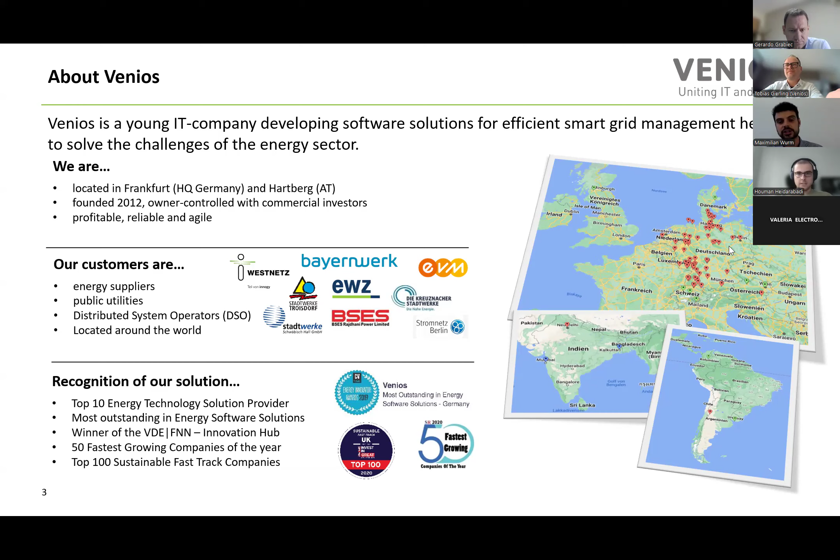And as I said, I will start with a very short introduction about the history of machine learning. What are the key approaches in the field? This is maybe also just a reference for afterwards if you get the slides: what is there, what is the tool set? I think we should not go through each of them, but the idea behind it is the tool set is the same for everybody. And if anybody wants to join the field of artificial intelligence, now it's the perfect time, because to tell the truth, everything nowadays is based on deep neural networks.

And I have to admit, also my study plan of 8 years ago is more or less like the history of machine learning, and not many of the algorithms are still reasonable to apply. But one can see historically, it all started a long time ago when somebody thought about, oh, there are artificial neural networks. We try to simulate the brain. Just to have the idea how long it took.

But then only 30 years later, really progress had been made when the first computers emerged, which had a little bit more reasonable compute power. First, it was statistical approaches. Everybody who does forecasting knows the ARIMA algorithm. And then it started to do it with artificial neural networks. They were the very first primitive ones.

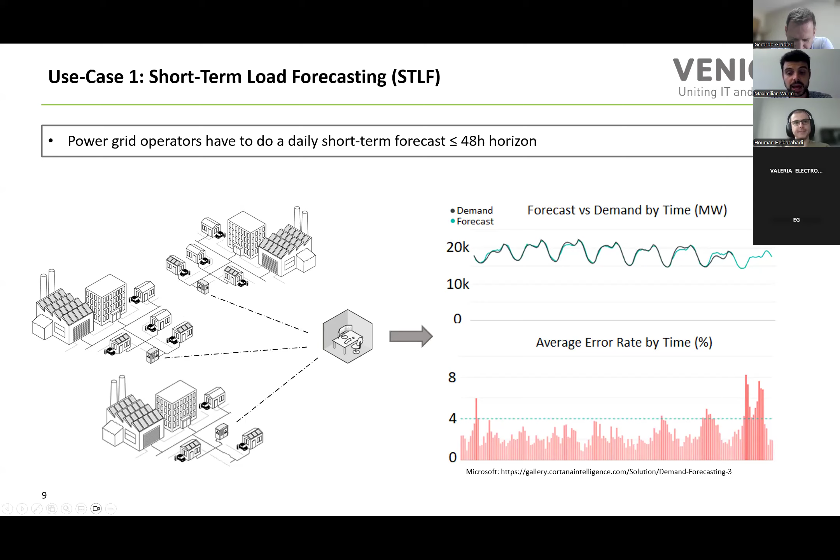And how do we do that in the end? Funny enough, there are a lot of approaches. You can do it statistically, you can do artificial intelligence, which of course is interesting for us. You can have expert systems. You can apply all kinds of intelligence to the problem, while statistical and artificial intelligence are both kind of AI.

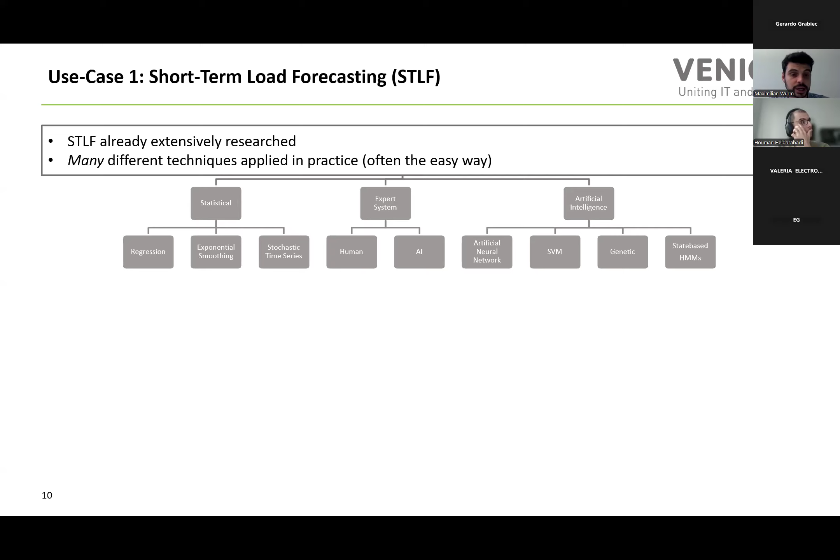But what is really used mostly in the industry, to tell the truth, is humans, which nowadays still make standard load curves. Here in Germany, for example, still. And this is where we also have a very nice market, because we can apply better artificial intelligence algorithms and with that improve the current prognosis quality.

One thing which is important: the more houses you have, the better the prognosis will be. Of course, it's the law of large numbers. If you have 1 million households, the prognosis quality will be much better than if you only want to prognose 2 households, because for 2 households, it makes a large difference if somebody is stuck in a traffic jam or not, and is at home at night or not. And for 1 million households, one person will be surprisingly at home and the other will be surprisingly away, and then it outbalances itself. That's what I meant with large numbers.

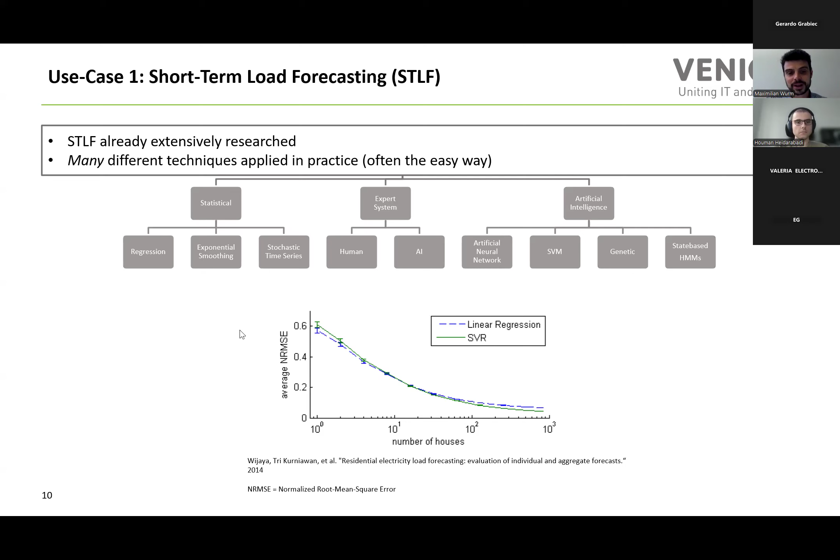A lot of DSOs nowadays don't really use all these cool artificial intelligence-based algorithms, but to be practical, to tell the truth, they really just take standard curves and sum them together. Like, I have 5,000 households and they all add up with a standard load curve. And then I have my consumption, and that's good enough for everyday life.

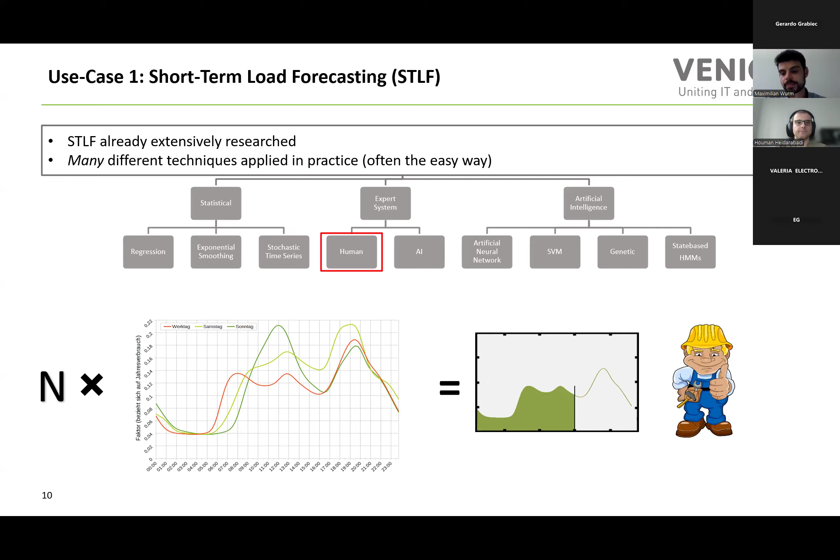Until now, and that's what is now interesting for the new generation, the energy system got much more complex, because these nuclear power stations I talked about disappear at some places, but then we get all these renewables and electrical vehicles, and you need much more insights. And that's what is then new.

As I showed you on the map, there are different algorithms you can apply, and neural networks are one of them. There are these statistical approaches, other historic approaches, but to get the very best performance nowadays with all the compute power, it's mostly artificial neural networks. You have a network, you give in the historic power, maybe the time you want to prognose, the weather, whether it is a national holiday or not. And then your neural network will in the end spit out the actual energy consumption.

And there are more complex architectures. This would be just a simple multi-layer perceptron, but there are also these long short-term memory networks, which, as I said, can remember the past much better. So they have a better understanding of what happened yesterday and what it means for today. Then you can hand in those and still have a fully connected network all going together and giving you a better prognosis.

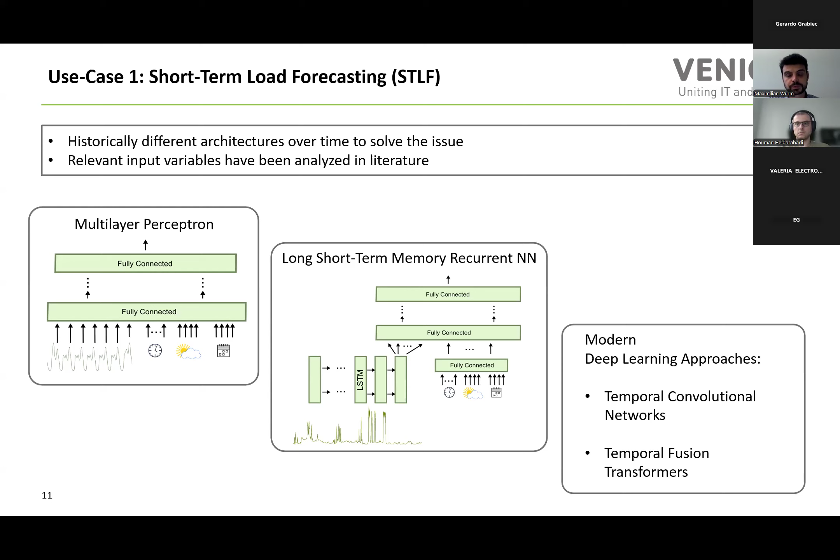Another application for it is non-intrusive load monitoring. So we leave behind the forecasting. Something else we can do is disaggregating loads in the field. That means you have some load profile and you want to understand what is in it. This is indeed a real measured load profile from Christmas Eve at my parents' place when I was at home in 2017.

And here you can really identify appliances based on artificial intelligence. So you can actually see what I did on my Christmas evening. We had an electric heater on because we were sitting in the garden first, and it was winter. And then somewhere around 5, my mother started the stove for the dinner.

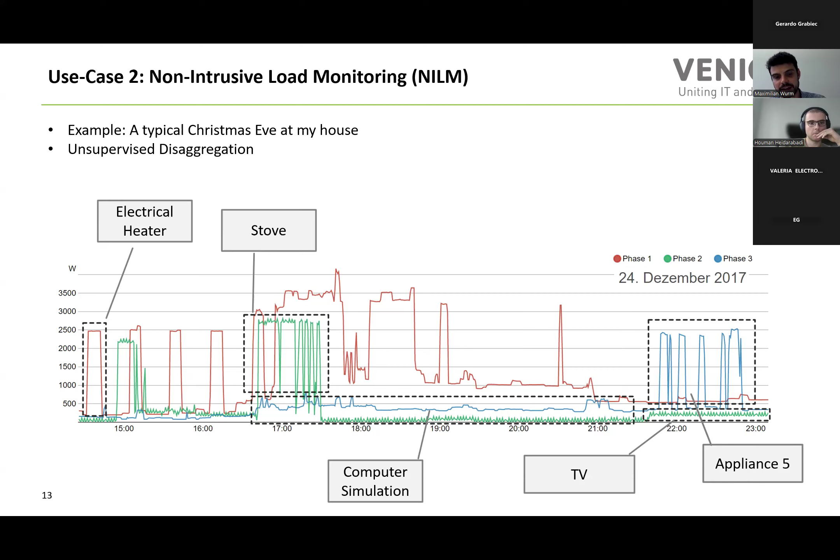In the end, I still had work on artificial intelligence going on that year. That's why you can actually see my PC in the background running an artificial neural network and training it. And then in the very end here on the right, you can see the dishwasher after we had our dinner. And for this, you need an algorithm as well, which understands, okay, this pattern here is maybe the dishwasher. Oh, apparently these slides broke.

In the end, it's really the same thing as when you want to identify an elephant in a picture. You have this complex picture and you want to recognize a certain pattern. Just that here you don't look for the elephant in the picture, but you look for the stove in the power flow. And until today, there are really a bunch of different algorithms for this disaggregation.

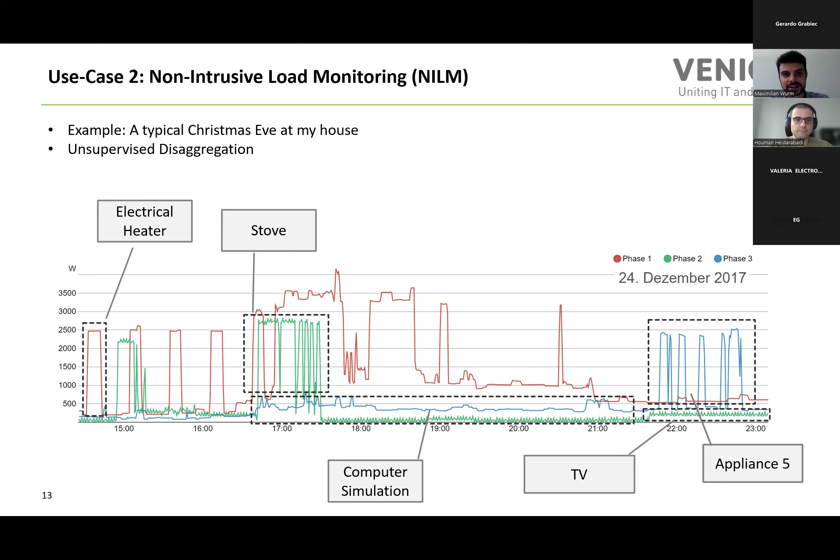And now we have a third use case, and this is actually presented by Houman, because that was actually your scientific work at TUM, right? University in Munich. Yes.

So should I share my screen or will you continue? I can share. You just give me a short... continue. Okay. So let me start from the first topic. Thanks, Max.

Now I will be presenting my master thesis at TUM on enhancing power flow studies. So I used physics-based deep learning to solve the power flow problem. And we are currently working to implement it in our future work. So firstly, power flow analysis is fundamental for design, operation, and planning of electrical power systems. It allows us to calculate voltage at each node and determine how real and reactive power flows through the lines in the network under steady state conditions. Please continue, Max.

However, there are challenges with traditional methods like Newton-Raphson and Gauss-Seidel. These iterative methods often face convergence issues, especially as the system approaches the voltage collapse region. The increasing nonlinearity and uncertainty introduced by modern demand, as Max explained, and the integration of renewable energy resources exacerbate these issues. Continue.

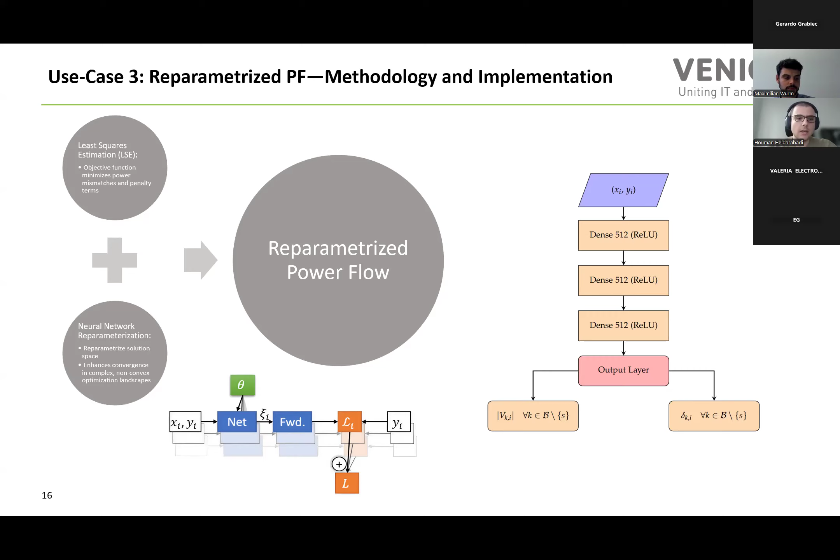So for the implementation, we used Python, and in Python we used, as Max explained, TensorFlow and also PyFlow, which is developed by TUM. Also we use MATPOWER for the validation process, which you can see here.

So first we need to validate our least square estimation against the traditional method. So we have to show that our least square estimation is exactly or is similar to the traditional power flow problem. So to do so, we have tested it on two power systems. One is a 5-node case study and a 118-node case study. So after validation, we do a performance analysis on our proposed method.

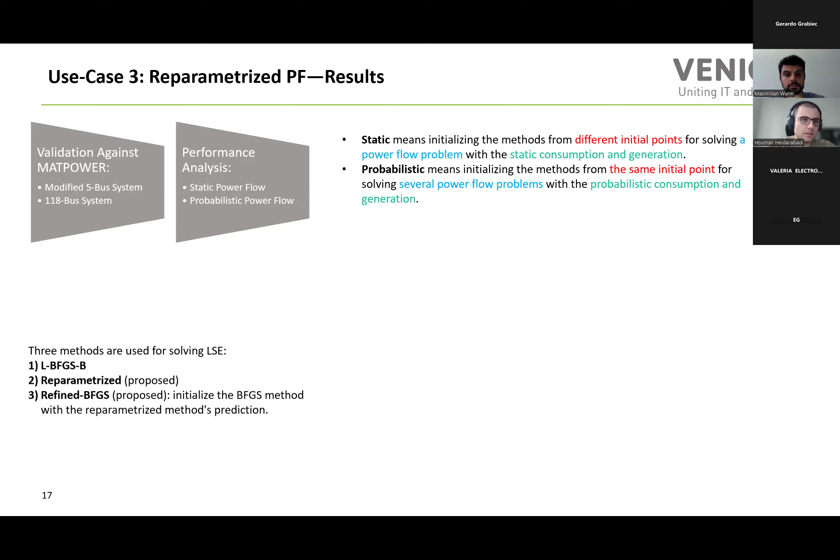So in the performance analysis, we compare it with, can you go to the next? Yeah. We compare our proposed approach with another solver, named BFGS, which is a quasi-Newton-based algorithm. So here in the performance analysis, we have two case studies. One is static and one is probabilistic.

So in the static power flow, we initialize each of these methods that I explained from different initial points for solving a power flow problem with static consumption and generation. But in the probabilistic one, we initialize it from the same initial point, but we have several power flow problems with probabilistic consumption and generation.

So as you can see from the results, our proposed method can outperform the BFGS method. And if we use the refined BFGS method, which means that we initialize the BFGS with the prediction of our trained neural network, we will have a very robust and accurate solution with far fewer iterations to reach the optimal point.

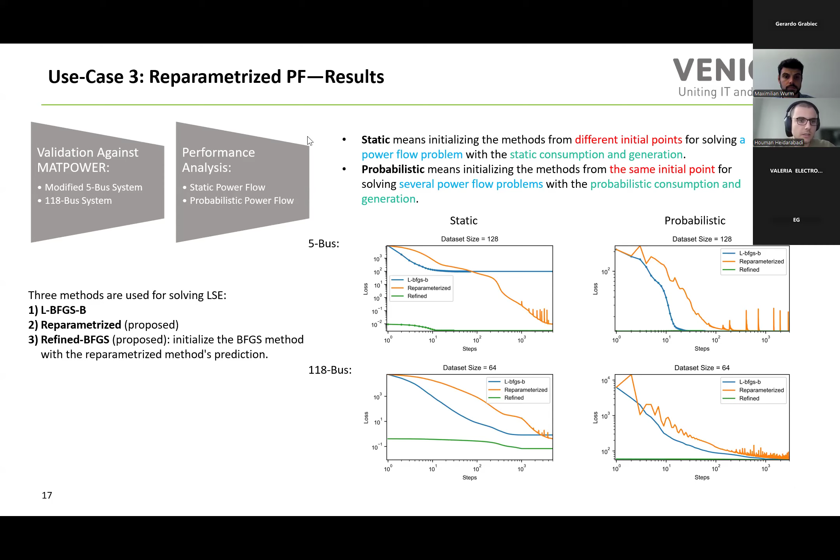Yep. So our research significantly enhances power flow analysis by reparameterizing the solution space with a neural network. We develop a hybrid framework that combines least square estimation, the BFGS algorithm, and neural network reparameterization, resulting in more accurate and robust power flow solutions. This approach was validated through comprehensive case studies, which you have seen, the 5-node and 118-node studies.

So looking ahead, we are working on extending the model to manage more complex scenarios, especially with high levels of renewable energy integration. We also plan to integrate real-world measured data to create a hybrid physics-based and data-driven model, and extend our approach to solve optimal power flow problems.

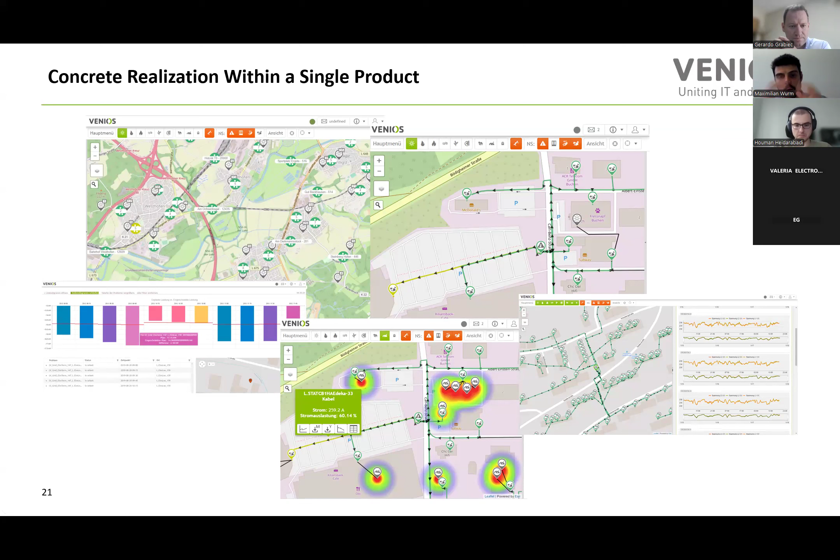And now I shortly want to jump over into the solution, just so you have a short five-minute glimpse of what this really looks like if you visualize it. So I'll try to switch over to my browser. Here we are. Are there questions so far while I'm changing my screen?

Not yet, that is perfect. So I have to somehow say to Bildschirmfreigabe, where are we? So Max, we are - yeah, you're just seeing the other one. I know, I'm just trying to figure out where I can stop the screen share. Here it is. Now I managed, and now I switch over to my browser.

So hopefully you can see it now. Yes, perfect. So we have a lot of applications, and exactly what I said earlier, all these topics about grid operation, grid planning, grid strategy - you can enumerate them and we just add them one by one. So if you have a cool idea about a use case, you could theoretically approach us and use our API to put your solution on top of the available infrastructure.

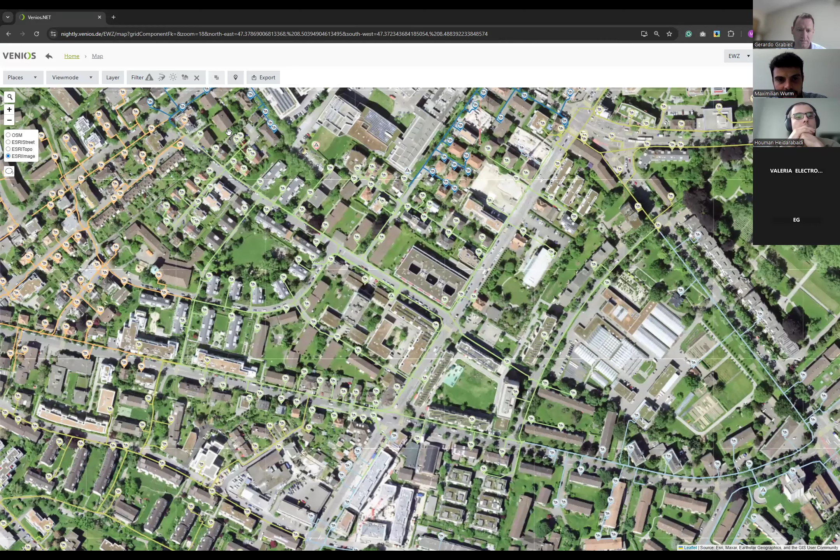And if we now do one of our power flow simulations - and these power flow simulations can really be done, as Houman just explained, also based on an AI to make it faster - because then we can not only do it every 15 minutes for a city, for example, but we can do it every minute. Actually, we're talking about much higher frequencies, like really a sub-second, sub-minute time span.

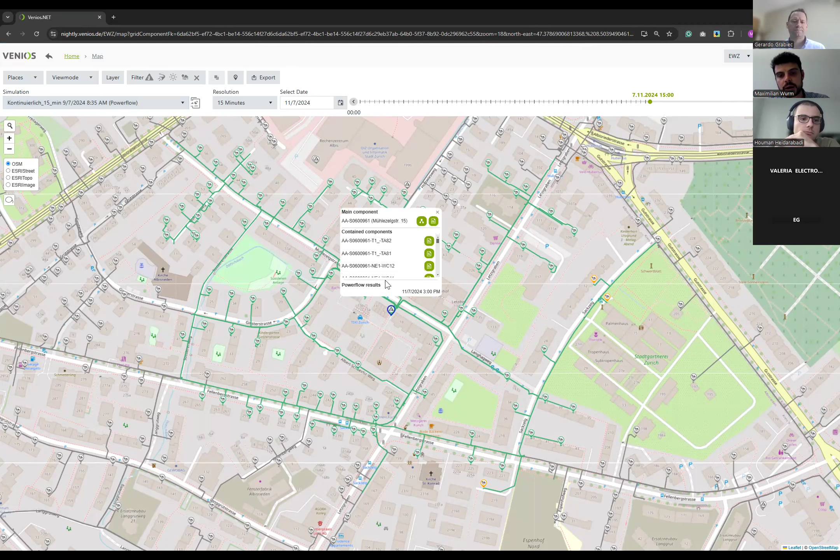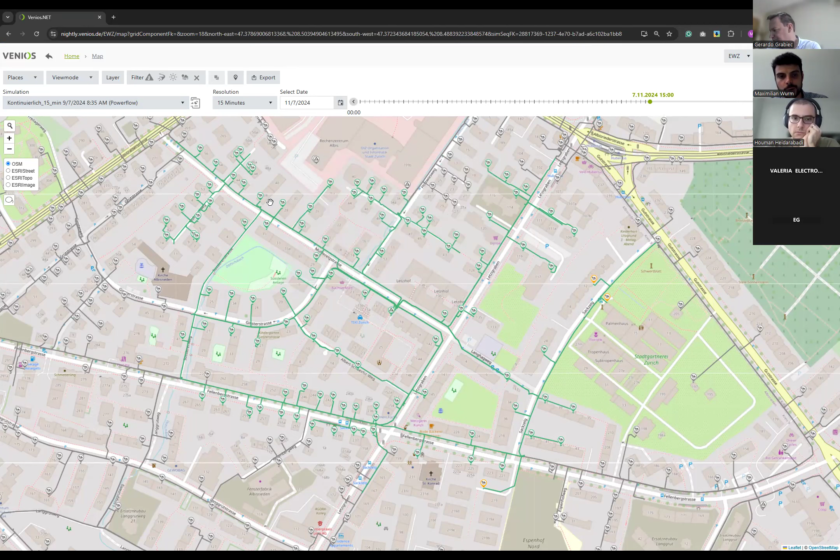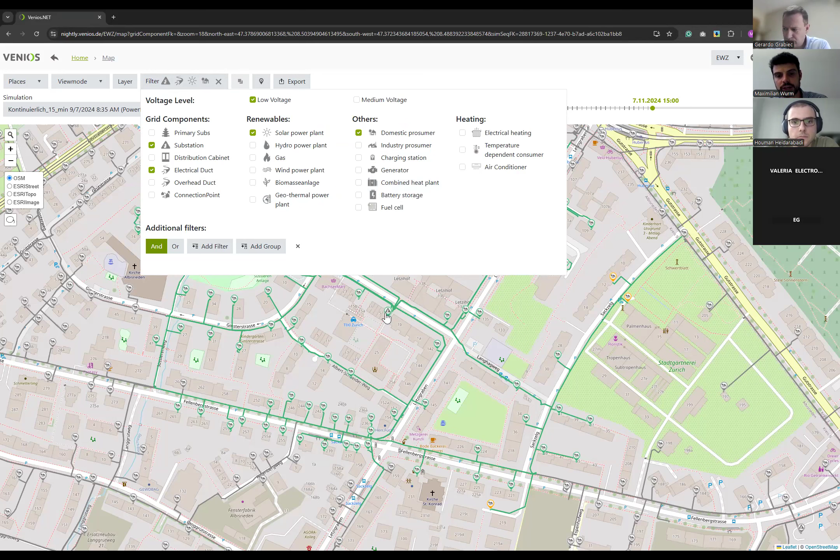Now I switched over, looking at one of these power flow calculations, and you can really see what is the power going into the grid at a certain point in time. Then you know, okay, currently I consume 700 kilowatts of energy flowing into all these households, because for each of these households in the field, you have in the end really a model. We have that for all kinds of elements which are connected to the grid, and if I look onto the history of the timelines, that is very interesting.

Because if we do it in a modeled way, like what I just explained, you can see it looks very smooth because my model is telling me that it is working this way.

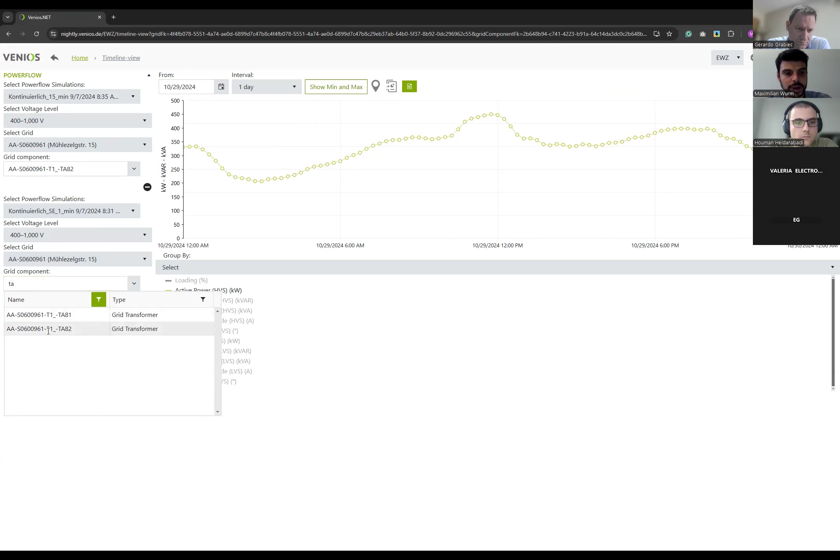But we still have measurements. If I switch over to show the measurements next to it for the very same grid area, it gets apparent that the reality is, of course, less smooth. But it's interesting because you can still see that the model kind of catches the trend. Even without the model, the measurements included, you can see it's going down, going up again, and somehow our prognosis was in the middle of what was the actual power consumption.

But with the measurements, it is much easier to see, because here you can really see there is a charging station, and it switched on and off, and on and off again.

What would be another application you could see here? It's a dream to do this non-intrusive load monitoring, like this disaggregation I showed earlier, because it's very easy to identify here when my charging station is switched on and when it is switched off, and to identify it in the load.

And these are just all explanations of what we do. We do a power flow, we have these models, and we can do this disaggregation. And if we put it all together, this creates a holistic solution, which is even nowadays already really used by distribution system operators.

And this is more or less the whole message I wanted to send today, that artificial intelligence is always a buzzword. But in the end, you can really apply it to solve concrete issues in the grid, create transparency, and follow use cases. And yeah, that's from my end, from Houman and myself.

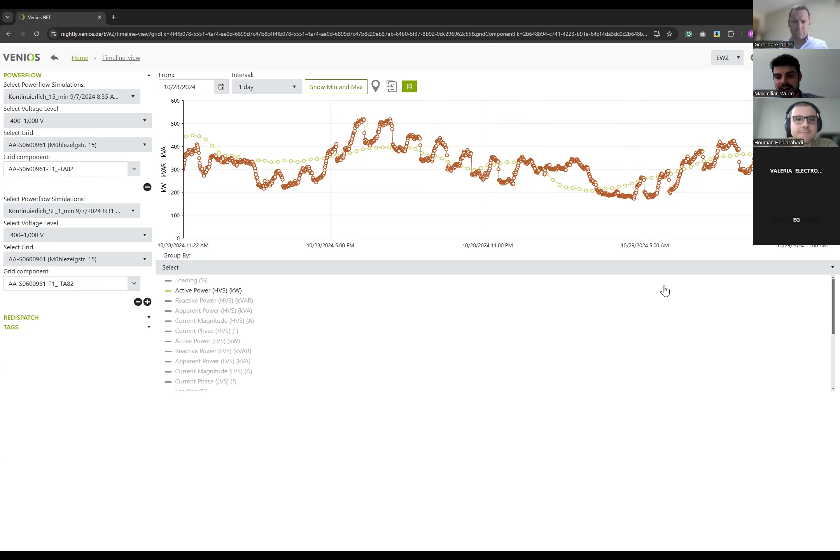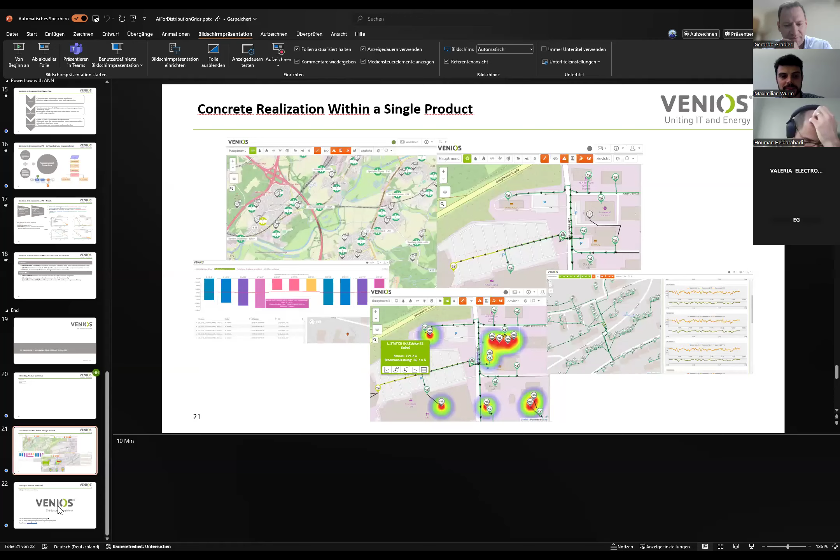Thank you, Max, for your presentation. I have a question. Yes, in a few words, no? As a summary.

What is the substantial difference between ADMS and your system? A summary, for example, functionality, prediction, digital twin.

In the end, the ADMS, which is an advanced distribution management system, is a little bit more focused on the distribution and the energy, how to say it, the prosumers in the field, finding intelligent algorithms there and focusing much more on how to optimize prosumers against each other. For us, the focus is much more also on the grid itself, like a SCADA system, an actual one, which does a power flow calculation using the grid topology. But to tell the truth, we are kind of also scratching the use cases of an ADMS. The intersection is very large because the definition is also a little bit fuzzy. In the end, you could also say ADMS includes the topology and also has a grid calculation inside, so I would not even say we are not an ADMS. It depends a little bit on the area of the globe where you are talking about the field, to tell the truth.